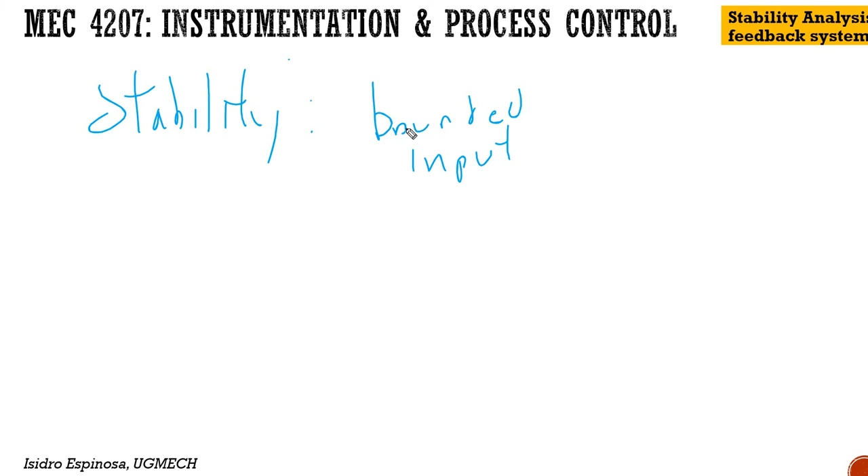So stability: a system can be defined as stable if every bounded, finite value or input produces a bounded output. Okay. So let's say if we apply an impulse input and the system output tends to infinity as the time tends to infinity, then the system is unstable.

So here we also have another statement that we can find in stability in control systems: critically or marginally stable. That means that critically or marginally stable systems normally tend to some finite, but non-zero value. Okay. So let's look at these diagrams or these graphs to understand a little bit more the meaning of stability. Okay.

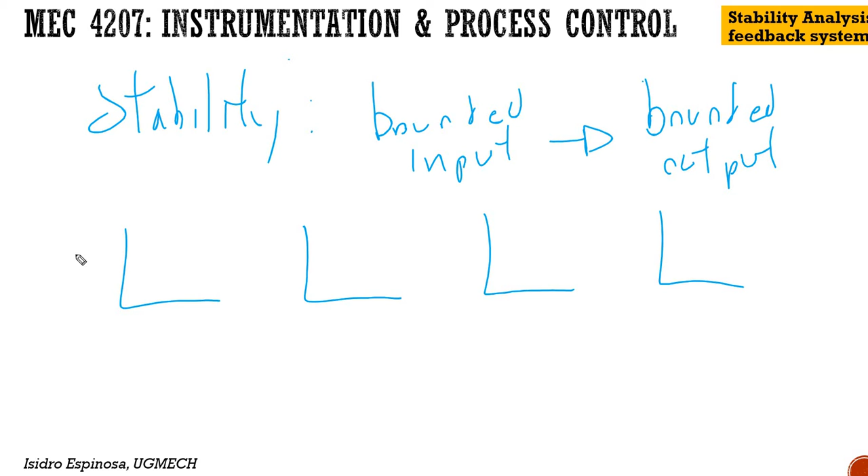Where we have the function with respect to time, right? So we have the first function, theta 0 is equal to 2t. The second function is theta equal to 5. Another, for example, theta equal to exponential minus t, and theta equal to exponential t. Okay, so what are the behaviors here in terms of stability?

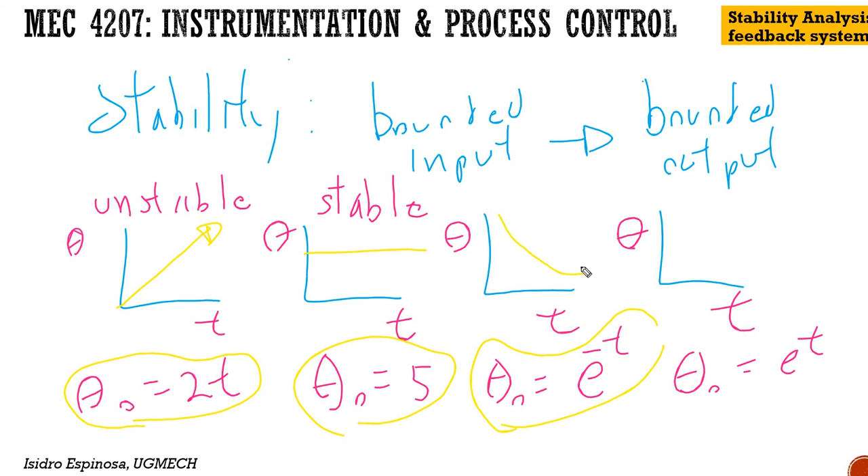So if we draw this function, right, we have something like this. So this is increasing over time. So this system is unstable. Okay. What happens when we draw this one? It's just a constant line. So this one is a stable system, as we can see. What happens when we draw the negative exponential, right? This is a stable system.

Okay. The last one, because it's a non-negative exponential, goes up without limit. So this is unstable. So this is how we have an assessment of stability with a general overview of the function. Well, in this case, the transfer function, right? So let's see how to evaluate the stability in a control system.

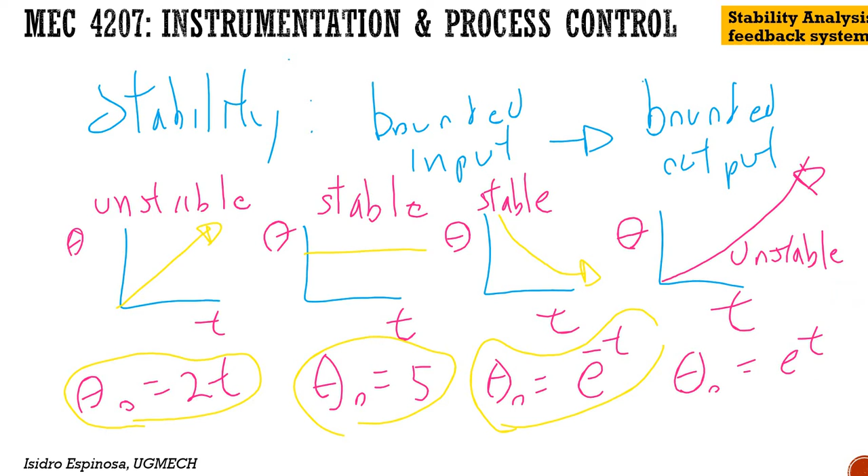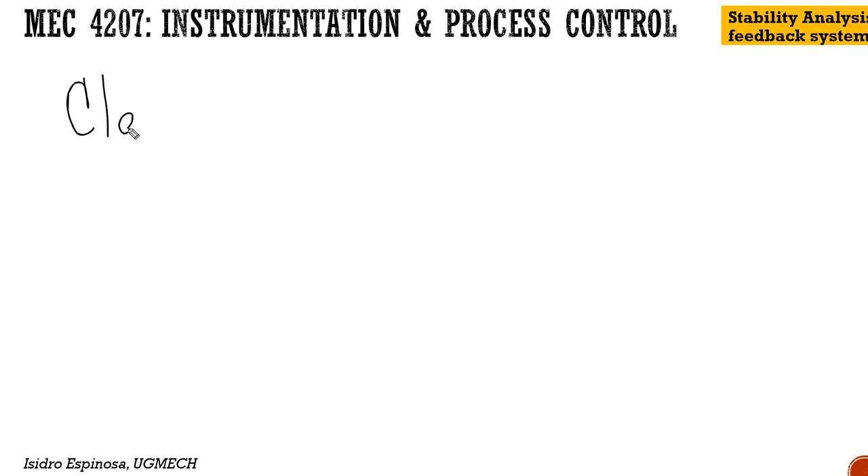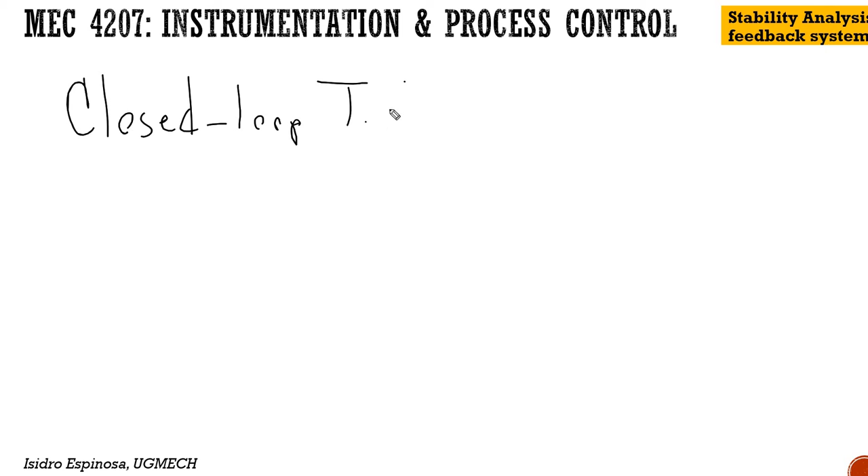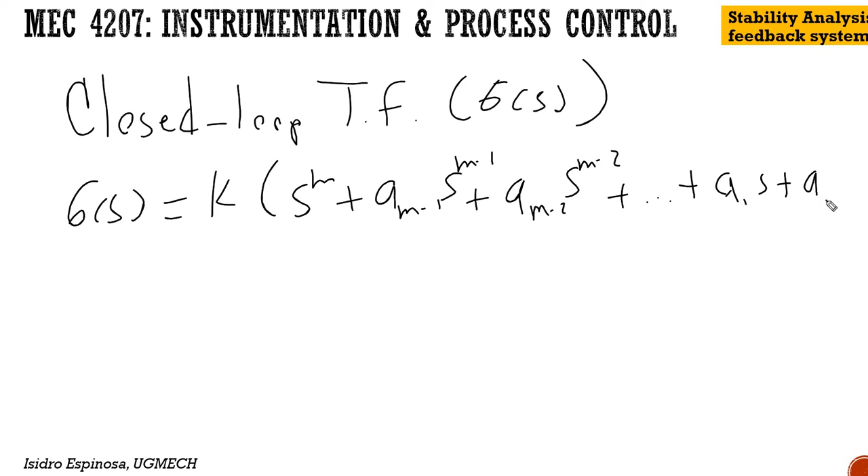So we have a closed loop transfer function, okay, as G(s). So we have G(s), the general transfer function, K multiplied by the polynomial equation, right? And the coefficients. And this continues until we have just the constant, one constant. Okay, this is divided by another polynomial.

This is Bn minus 1 s to the power of n minus 1, plus Bn minus 2 s to the n minus 2, plus B1 s plus B0. Okay, and if the roots of the denominator and numerator are established, it has the following equation, right? K is a constant, times (s plus P1)(s plus P2) up to (s plus Pn).

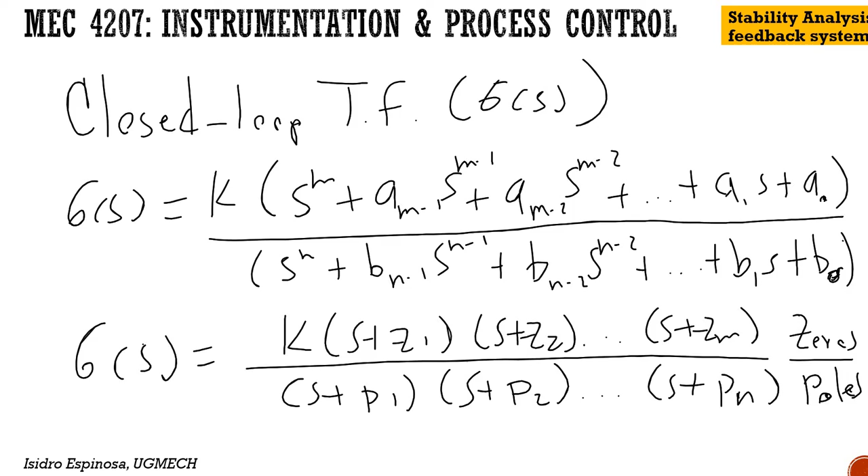Okay, let's say, for example, we have a function like s minus 2 over s plus 5, right, where the numerator is s minus 2 equal to 0 to start finding the roots, and the denominator is s plus 5 equal to 0. So the root for the first one is s equal to 2, and the root for the denominator is s equal to minus 5. Okay, so this is the zero, and this is the pole. So the zeros and poles can be real or complex numbers, right?

For example, if the denominator is something like, let's say, s squared minus 6s plus 8. In order for me to do the factorization or to start to calculate the zeros, it will come like s minus 4 multiplying s minus 2. For this case specifically, the poles are plus 4 and plus 2.

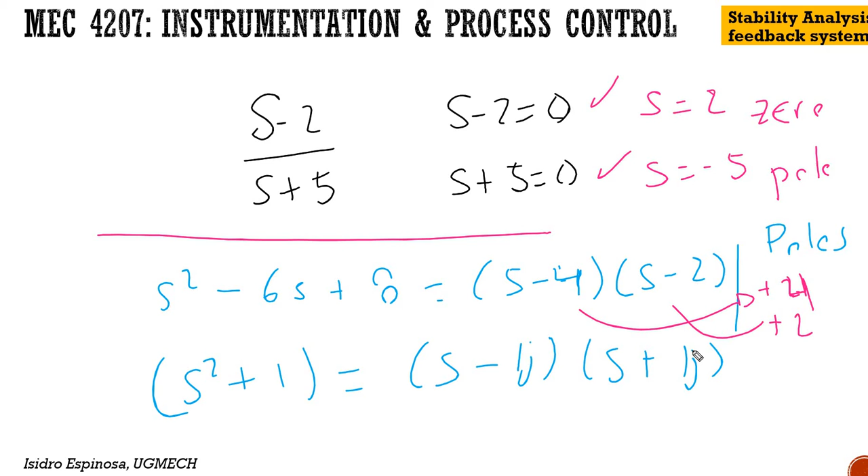Okay, so now if we have something like s squared plus 1, if we're trying to calculate the roots, the roots will be something like s minus 1, s plus 1, right? But in this case we will have imaginary numbers. In this case we add the imaginary component, and here the poles will be plus 1j and minus 1j.

Okay, so this carries us to the next expression that can be found for poles and zeros: s is equal to the real part plus the imaginary part. To explain these two terms a little more: s squared plus 1, when we equate it to 0, will be s squared equal to minus 1, and the final root value of s will be the square root of minus 1. That will give you s equal to plus or minus j. And this is why you have the imaginary parts for this term.

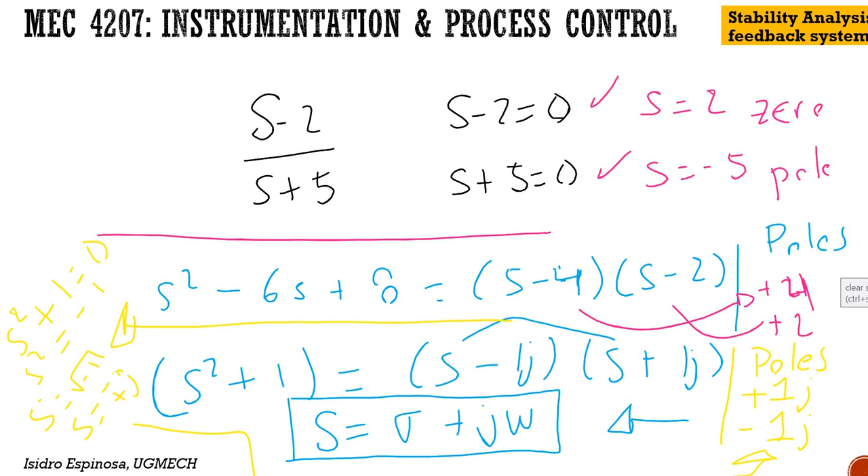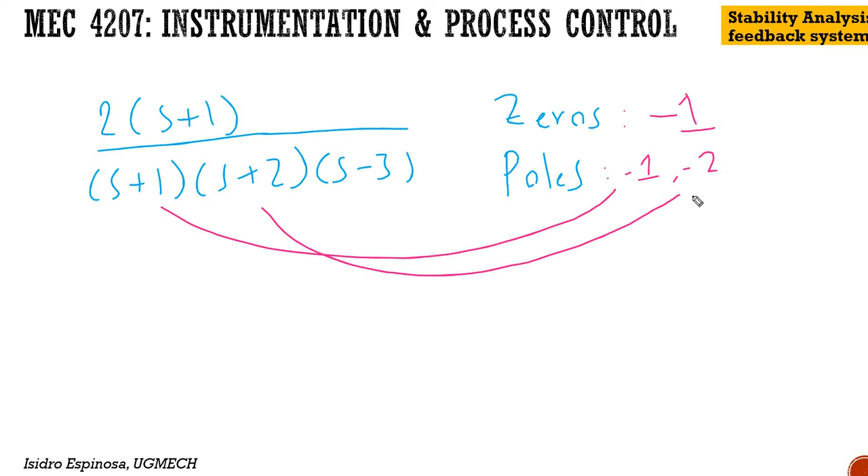So now just as an illustration, let's say we have a transfer function of 2 multiplied by s plus 1, over s plus 1, s plus 2, multiplied by s minus 3. So what are the zeros? What are the poles? The zero for the numerator is minus 1, as we can see. And the poles for the denominator are -1 for the first one, -2 for the second one, and +3 for the third one. Okay.

Another example, if we have s plus 4 over s squared plus 1s plus 3. For this one, the zero is clear here. The zero will be equal to -4, and for the poles, because we cannot factorize immediately, it's recommended to use the general equation: -b plus or minus the square root of b squared minus 4ac, over 2a. In that way we can calculate the poles, which will carry you to -0.5 plus or minus j 1.7, approximately.

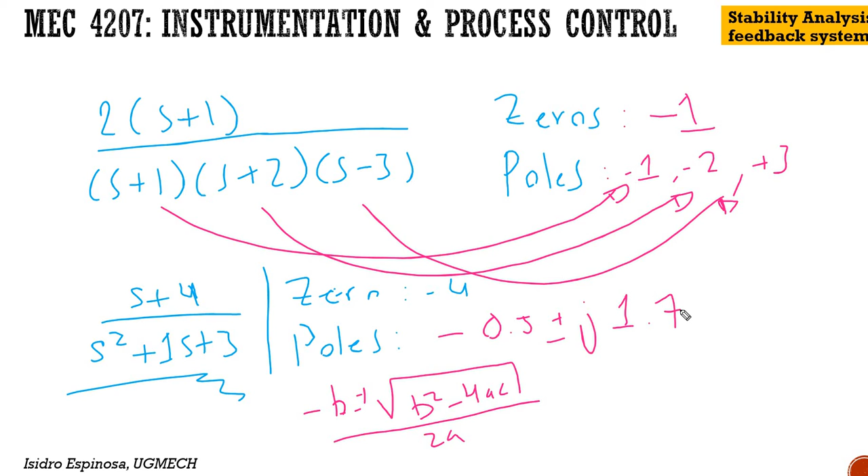So to illustrate this, root locus exemplifies how we go about plotting the poles and zeros in a pole-zero plot, in order to conclude in general form whether the system is stable or not stable.